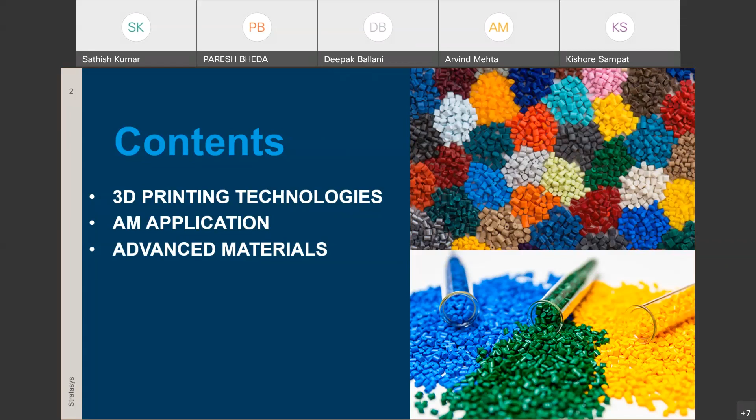Good afternoon, everyone. I'm Sathish, and I'm going to talk about how, especially in the way innovation is happening using 3D printing technology, we can drive more focus towards the manufacturing sector. Today I will talk about what 3D printing technologies exist, and there are many, as we can see, a lot of 3D printing technologies available. I will go in depth into what each technology helps with, and on the application side, how people can take it forward from each application, and what developments are happening overall in the 3D printing industry, especially advanced materials, and how people are now using those advanced materials in developing their processes and technologies.

So what is 3D printing or additive manufacturing actually? It is a process of joining materials in order to make an object. This definition was given by ASTM, the American Society for Testing and Materials, and they also recognized this as one of the manufacturing processes. That is why 3D printing turns into additive manufacturing.

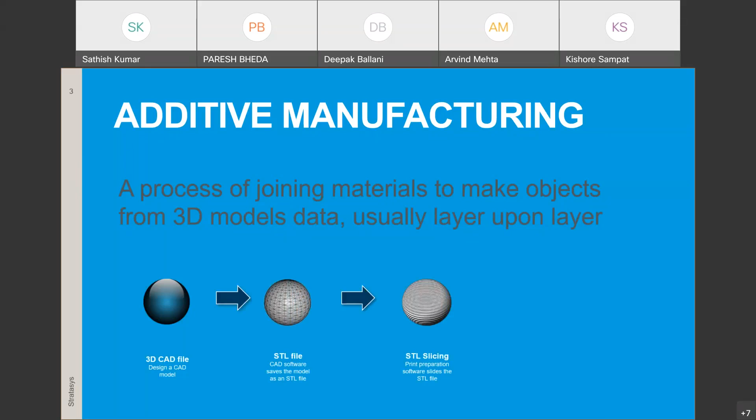For any 3D printing process, first and foremost we need some kind of CAD model, either from CAD software or through scanned data. This data generally goes in the form of STL, standard tessellation language, made into a mesh file. This data is given to a software that does slicing—similar to how a CNC machine makes a G-code, 3D printing software makes STL slicing, which slices the model layer by layer. This process is then fed into a machine where it actually prints layer by layer.

That is how the entire 3D printing object is created using this additive manufacturing process. Now, why do people want to go for this kind of 3D printer? Most of them will focus on these 4Cs.

The first C is compression of time. Right now in day-to-day manufacturing, time plays a very major role, and everybody wants to be agile and make their product innovation faster. That is why 3D printing really helps them cut off their time. If we compare with most traditional processes, you can squeeze the time close to 60%.

The next important activity is creativity. Sometimes there is complexity involved in product design that people want in manufacturing. Here we can overcome all levels of complexity and do creative innovation in printing, because 3D printing doesn't rely on traditional manufacturing processes. As it works layer by layer, the complexity comes for free.

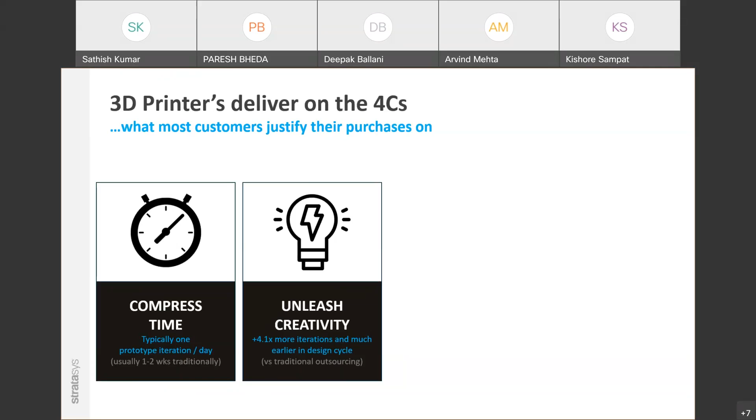The next very important C is cost, because cost plays a major role in any manufacturing process. Especially when you determine how the product or tooling is going to work for your requirement, everybody wants time consumption and cost benefit requirements. That is why 3D printers help in getting the end product requirement at a very early stage with almost 50 to 60% cost saving.

And foremost important, right now people are protecting their IP, intellectual property, so confidentiality. Any design, whether in mold design or thermoforming or many other processes, involves process innovation. If you take it from product design, it's a design; if you take it from manufacturing, it's how we design our gating. Everywhere that process innovation needs to be protected - that is the reason companies want to develop everything in-house.

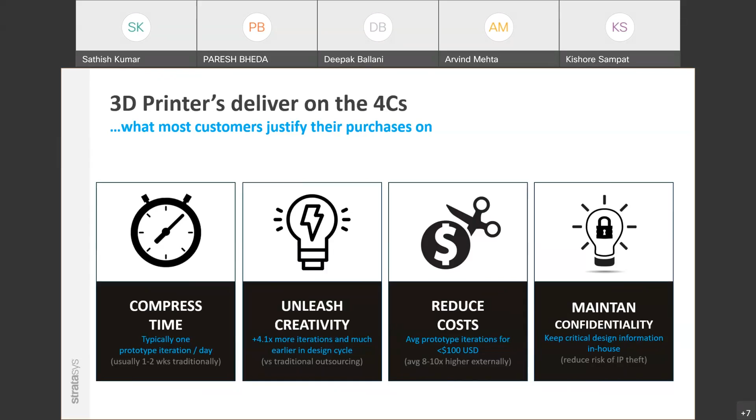So these 4Cs are what actually help 3D printing meet most product requirements. Now, what are these industries actually using this AM?

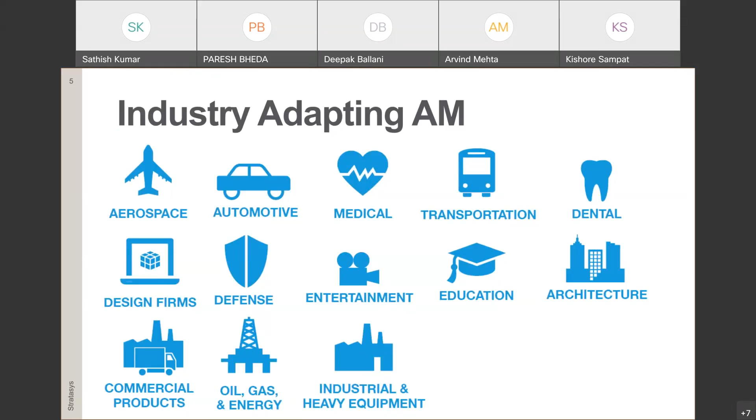AM means additive manufacturing. What are the industries? We can start from every industry - aerospace, automotive, medical, transportation, even oil, gas, energy, heavy industries. Everywhere right now they are using 3D printing. The main reason is because it is flexible for their process requirements, and it helps them across their entire product life cycle.

People start from initial design and want to move from design to engineering. They want to fine tune from engineering, work out on manufacturing aids, tooling, jigs, fixtures. Then they want to go for some alpha production and beta production, some very low volume production. Across the entire product life cycle, this 3D printing is helping.

We also have many different technologies to help in each of these processes. For focusing on the design segment, there are technologies called jetting and SLA - these are terms used by ASTM. If I mention extrusion technology, these come under extrusion technology. We have each of these processes defined by ASTM.

These two things come under it - jetting means PolyJet technology, FDM means fused deposition modeling technology. Now, if you want an extremely high level of quantity and you want to focus on mechanical requirements, we have a technology called powder bed fusion.

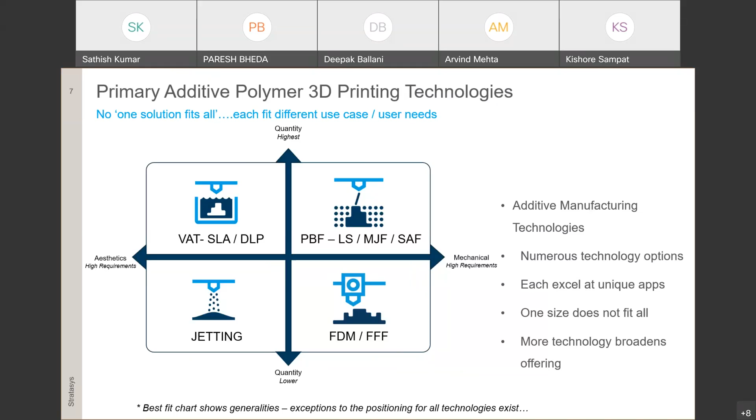The first technology is called FDM technology, which means fused deposition modeling. This technology was invented 30 years ago by a gentleman called Scott Crump, the founder of Stratasys, who invented this FDM technology.

This technology works similar to how people coming from an injection mold background would know, using thermoplastic material. Here, instead of pellets like in injection molding, this thermoplastic material is in the form of wire.

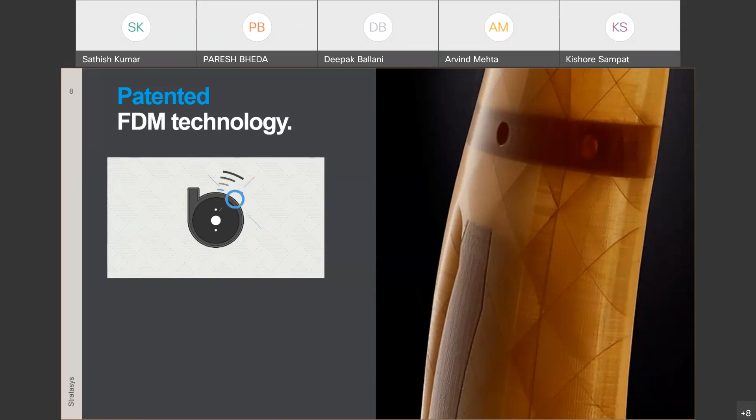As you can see from the animation, this wire is taken to a heater unit, which melts the plastic filament and extrudes it onto the tray to build the pattern layer by layer, from the top and bottom up. That's how we get the entire object made.

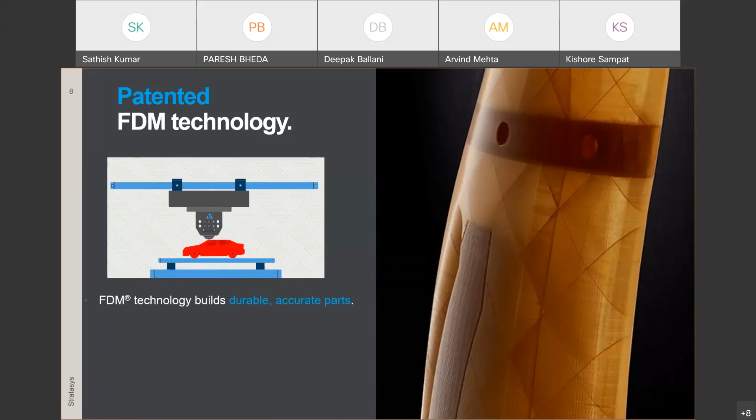This technology makes the most accurate and extremely durable parts. That's why this FDM technology is preferred by most people for prototyping, tooling, and also for end-use applications.

When I say end application, there are people from aerospace and medical industries who want to use certified grade materials and FST requirement materials. FST means flame, smoke, and toxic resistance - these are classified and certified materials for very specific purposes.

We can customize all these things based on the full range of material product portfolio, from standard materials to high performance materials.

What are those materials? Generic plastics from the ABS family or ASA family come under standard plastics. Going to the next level, engineering requirements include nylon, polycarbonate, and polycarbonate-based ABS material - this comes under engineering plastics.

Going to high performance materials, polyetherimide and polyether ketone, where people want to work in areas requiring high chemical resistance and superior mechanical properties.

Now take a material called Nylon 12CF - CF means carbon fiber. In this material, along with nylon, carbon particles are added - 35% carbon particles. This gives excellent properties, especially wear resistance and stiffness.

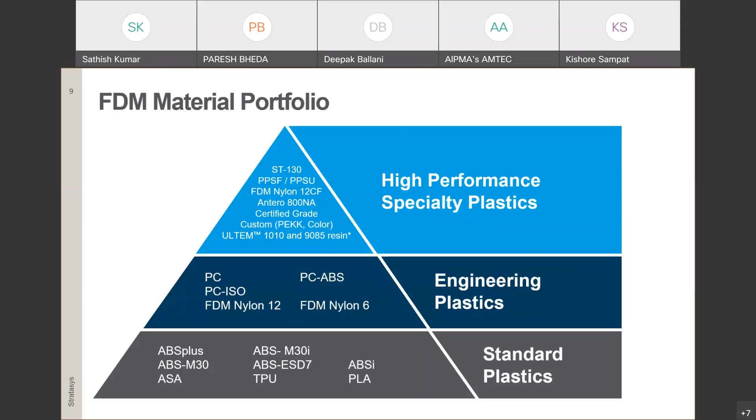For generic requirements, where there's so much material it can cause confusion about what to use, here's easy categorization: most fit-form-function applications and limited automotive testing parts can use standard and engineering materials like nylon and ABS.

Wherever you want excellent strength, a superior material that withstands high temperatures close to 220 degrees Celsius, food grade material, biocompatible specific material, ESD electrostatic dissipative material, or specific applications for space - in this area you can focus on high performance materials, simplifying the process.

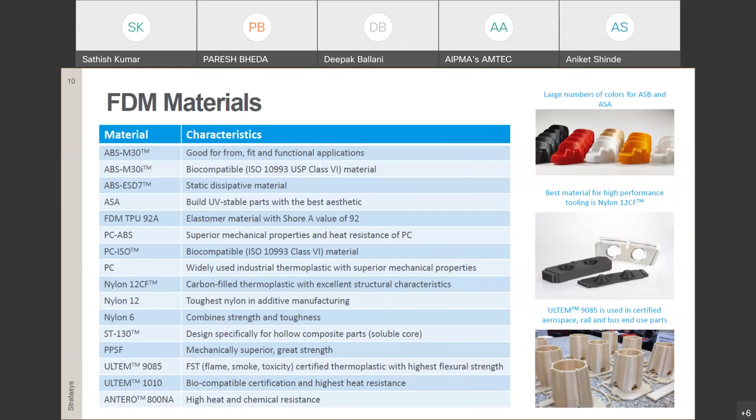What kind of parts can I use from this technology? You can make parts from smaller sizes to bigger parts, as big as a car bumper or even a truck bumper. You can make these because these machines are built for all durable applications.

You can use it not only for prototypes, but also for end applications. A quick summary: FDM is easy to use with all thermoplastic materials.

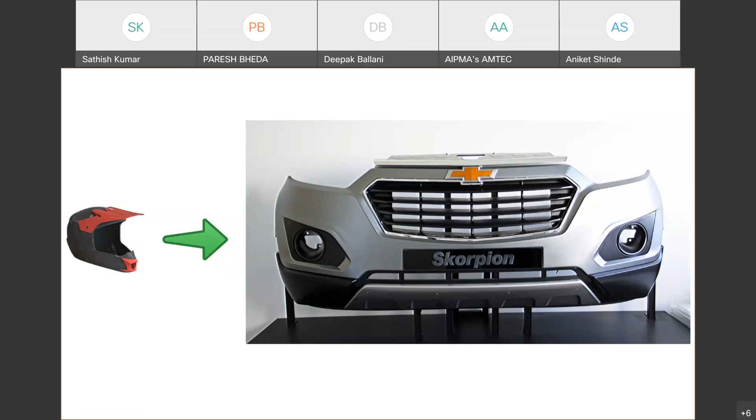You can use it from standard engineering and high performance. You can use it from prototype to tooling application. When I'm saying tooling, specifically you can use it on metal forming. You can also use it for fit form function. You can also take these for composite layup tooling, and end products, some of those things directly; you can use it for aerospace, every requirement. You can use this technology.

The next technology I'm going to talk about is called PolyJet technology. As per ASTM, this comes under jetting. Previously, FDM comes under extrusion technology. This comes under jetting technology. This technology, I would say, is a very powerful 3D printing technology. The most recent, it creates very beautiful, smooth and accurate parts.

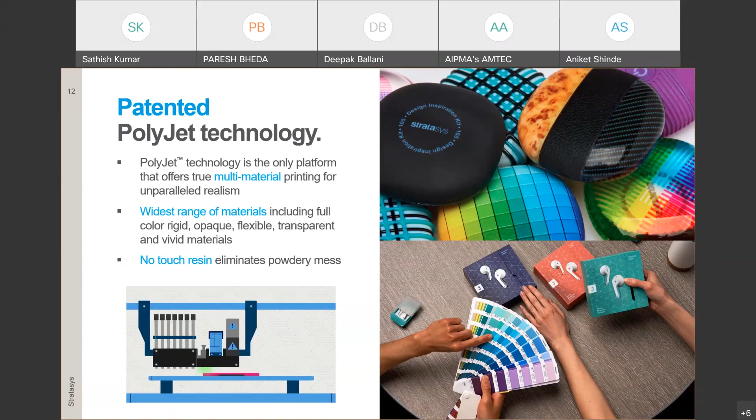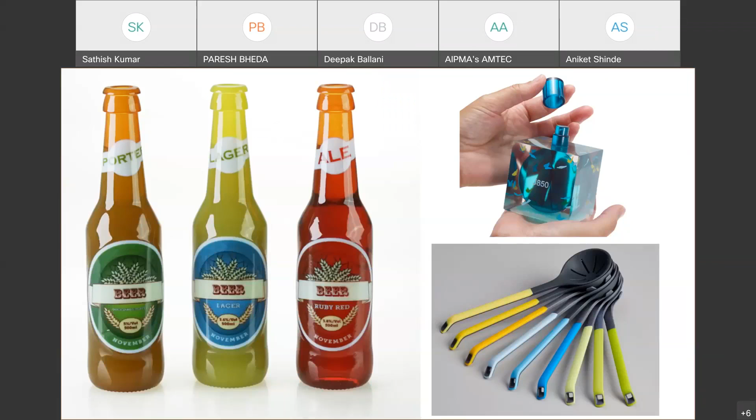Just to give some other examples of how this works, whatever parts you are seeing are 3D printed parts that came out of this technology. You can see the shape of the bottle; you can make a fit form, and also you can evaluate the colors. This technology will help you even take some of the Pantone color shades, because right now everybody is moving towards product innovation. You can also take those colors as part of your product design, get a very early stage of prototyping and evaluate it.

Is it only limited to that? No, you can work with something similar to a leather kind of material. It is not actual leather, but it mimics a leather-like texture. It mimics a wood-like texture, gives everything. And these are completely plastic. These are purely polymer, but it mimics a wood kind of appearance, so that you will get a fantastic CMF, what many industrial design people call color, material and finish. You will get this at the very early stage from this technology.

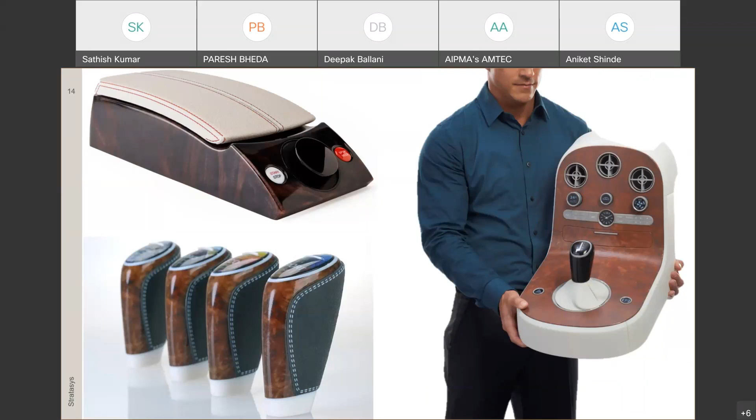Okay, what about this technology for manufacturing people? You can also make a mold out of it. With this technology, there are some engineering materials you can also use for molding. People can use these molds for applications like injection and also blow molding, which I will cover in more detail in my application slide.

The next technology I'm going to talk about is called stereolithography. Stereolithography is a very, very well-known technology available in the market. So how does this technology work? This technology uses a vat of liquid UV curable material, and this is also a photopolymer material. Here the UV or laser light passes over each layer and cures it at a time. That is the reason you can create very beautifully shaped parts from the machine.

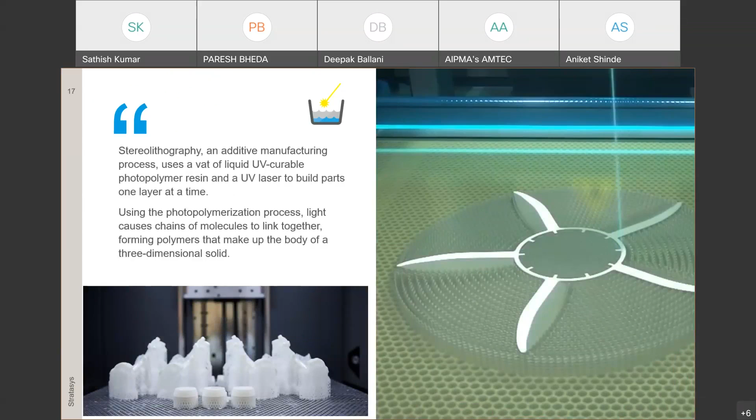And here you can get as much detail as possible from this technology. It's very good for making bigger, large-size prototypes. For manufacturing people, you can create a pattern out of it. Using this pattern, people can make silicone molding. You will get a very clean shape out of it. And there are a lot of applications.

You can also do some injection molding. You can also make some jigs and fixtures out of it. And there are also parts you can make for some end products. But primarily people use this technology mostly for pattern making and also wherever people want a very clean surface.

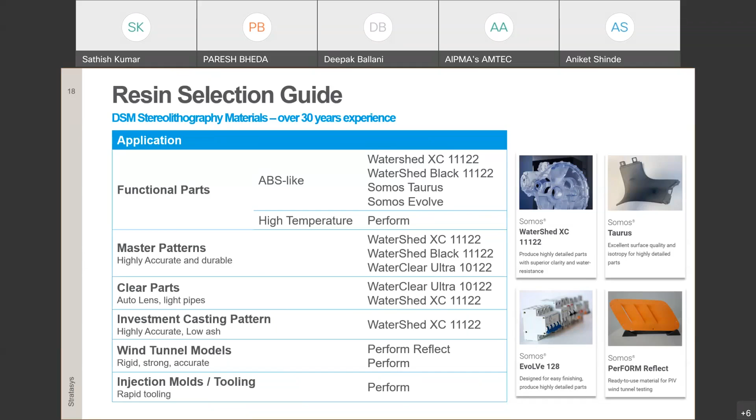And this technology primarily helps them with that. Now I've shown you FDM technology, PolyJet technology and stereolithography technology. The next two technologies I'm going to talk about are geared towards the production side. The technology name is SAF. SAF means Selective Absorption Fusion.

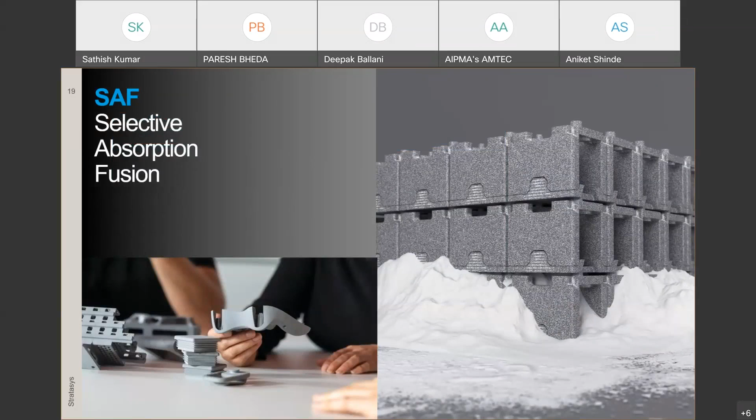So with this technology, you can see from the image, it uses a powder material. These powders are polyamide, and polyamide is nothing but nylon. So it uses a nylon powder for most of these applications. So how does this technology work? It's a print head based powder bed fusion.

So here, if you look into this one, the powders will generally be deposited throughout the inside area, and there will be a binding mechanism. This will be deposited layer by layer, and there will be a fusion agent which passes immediately when that is happening.

So what advantage do people get working with this SAF technology? You will get engineering material like nylon parts, and you can also make it for your extremely high volume production parts. You can take it for all mechanical strength applications. This technology really works very well for them.

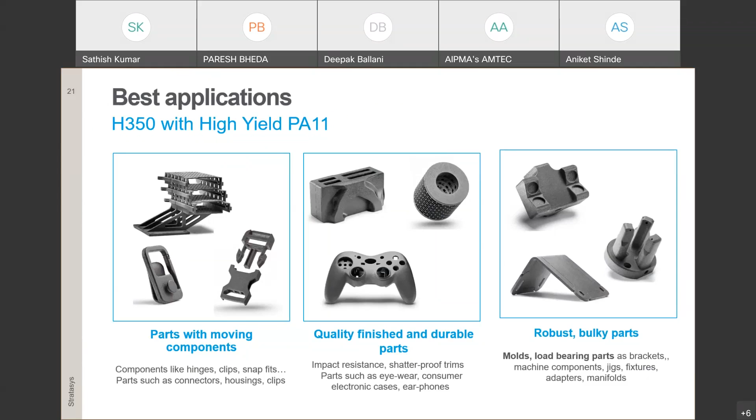Okay, is it limited only to small parts? No, you can also take some of the parts for snap fit applications, and you can also take it for mass customization requirements, because this is becoming more famous in that way. People are starting to make parts with it. This fits most of the applications people want to do.

The fifth technology I'm going to talk about is called P3 technology. P3 means programmable photopolymerization. This is an advanced version of DLP, digital light processing. It's a similar mechanism to how stereolithography works, but instead of the laser light, the entire light will make that area totally curable.

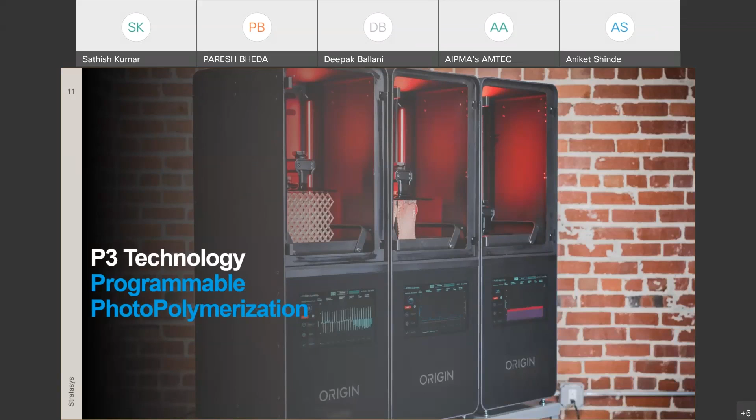So what is the advantage for people working on the DLP process? DLP is a very, very high throughput process. Here people can get extremely fine detail in parts taken out of a DLP machine. And compared to the limitations of stereolithography, you can go for an extreme range of high performance materials. They can customize their material in such a way that it works at extremely high temperatures and is also suitable for high impact load material properties.

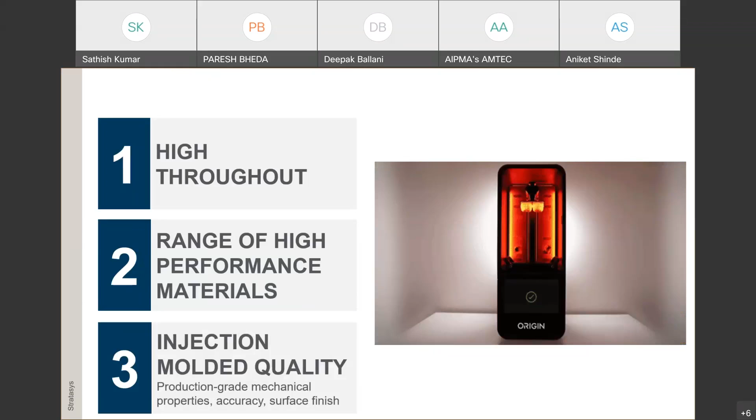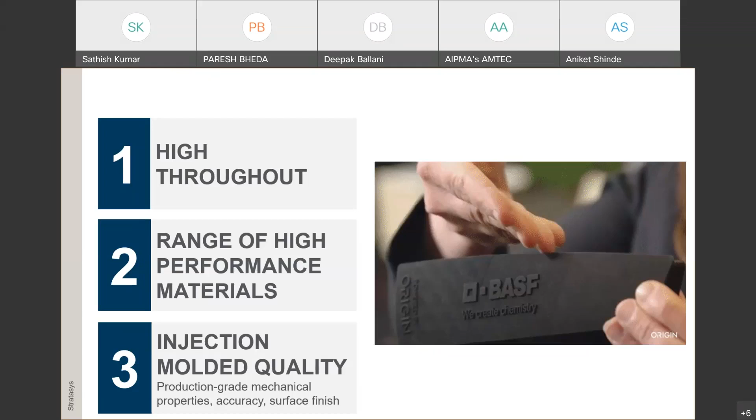And very importantly, right now it is extremely challenging to get the best injection mold quality in any 3D printing process. This P3 technology is designed in such a way that you can get details close to 50 microns. That means you get the best injection mold surface finish directly from it.

And as mentioned regarding high performance materials, you can also do material customization with this technology for very extreme high temperatures, where people specifically want to use it for FST, which I mentioned at the start of the slides: flame, smoke, and toxicity resistance, and also for high temperatures. These are specific requirements for most aerospace and defense applications. So here you can open up these applications with this technology.

And you can also use it for many mountings, connectors, brackets, all detailed parts. Whenever you want an immediate prototype with injection mold quality for very minimal parts, this technology really helps.

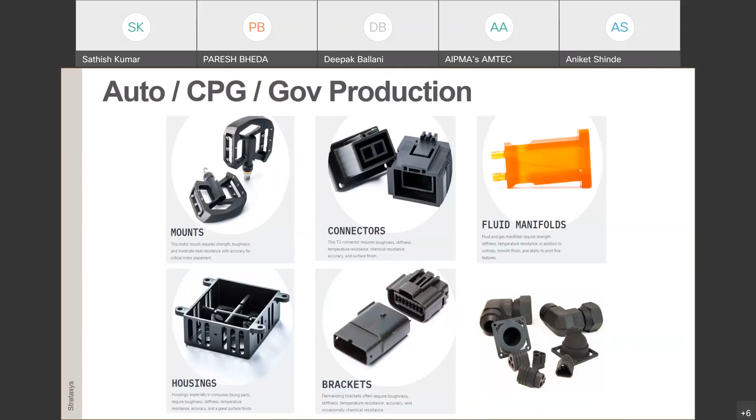Okay. I've now talked about all the technologies: FDM, PolyJet, stereolithography, SAF, and P3 technology. Now, how do people use these technologies in applications? Like I mentioned, people started using them for prototyping, and now people want to move to the next stage: tooling and end use parts. Tooling is for people in manufacturing, because this is mainly for the manufacturing floor.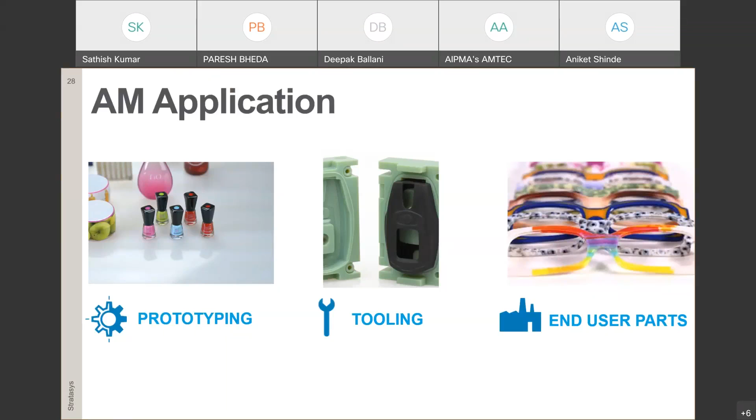So what is useful for you in manufacturing? People can use it for fixtures, for molds, for silicone molding, injection molding, even blow molding. A lot of things you can use it for.

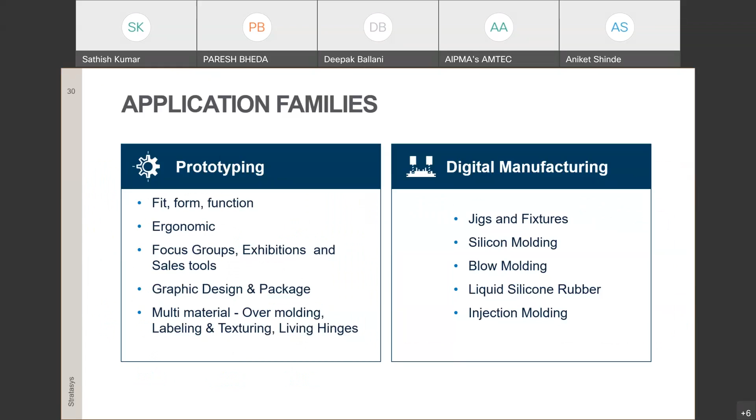How? Right now, in a lot of 3D printing applications, people primarily use it only for prototyping. Still, the blue ocean is what we call digital manufacturing. Silicone molding, blow molding, injection molding, most of them are still not really exploring those capabilities. So I will talk about a few of them in my next slide.

I'll also talk about one more part, called carbon fiber. People really want to make a lot of cost-reduction parts, converting from metal applications to lightweight applications. So carbon fiber is the best fit for people who want to make such parts in a customized way. Here you get the best of the part in strength, and you also get lightweighting.

Taking an example, many of them are asking about this right now. Looking at India as manufacturing, EV and drones are growing a lot. Lightweighting plays a very important role in increasing their payload capacity and also the battery performance. So you can consider adopting carbon fiber in that way.

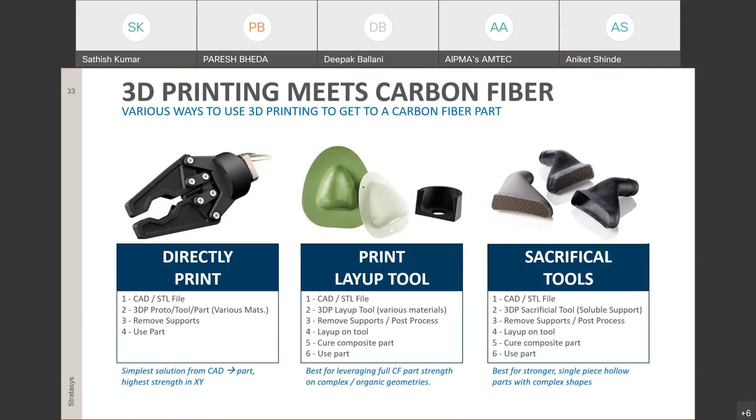Now there are many ways, instead of going for the traditional process, 3D printing helps simplify carbon fiber. You can work on the layup tool, sacrificial tool. So you don't need to spend a lot of money making a mold. Simplified 3D printing will help you develop such lightweight parts.

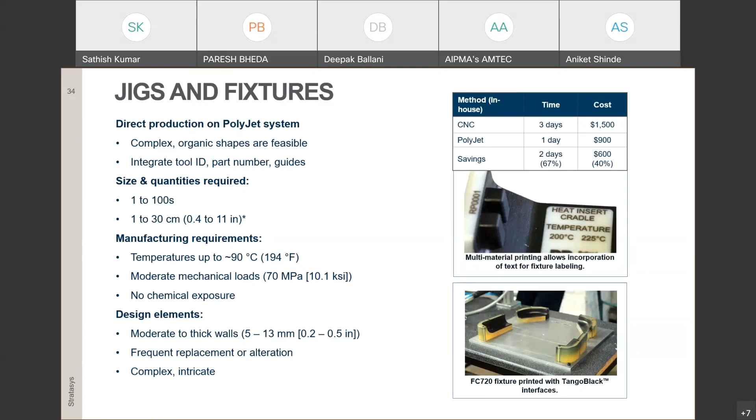Going into jig and fixture applications, you can see how this helps. People can work out a lot of such jigs and fixtures in manufacturing. In manufacturing, people even consider scratch areas with a multi-material process. You can use these different 3D printing technologies. You can also insert your part wherever you have a scratch-resistance area. This rubber material will help you prevent those scratches directly.

Talking specifically about silicone molding, stereolithography or PolyJet technology helps you create very beautiful parts. You can use those parts as a master, and using silicone as a mold, you can develop a limited number of parts, less than 100, less than 500, based on complexity, so you can reuse your silicone mold for that many parts. And if you want, you can work again with the same pattern. This is the very easiest way to create proto parts.

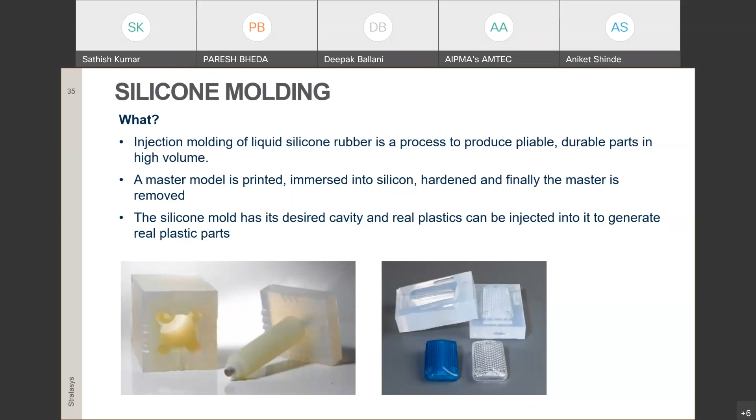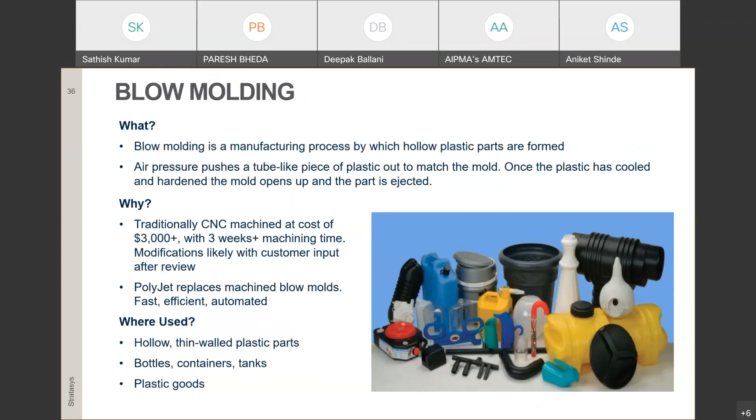And blow molding. Especially for hollow shapes, people want to work in a customized way. For low-volume parts, instead of CNC, you can try this PolyJet molding. So I will play a video in which you can see two processes: one is extrusion blow molding, and also injection molding.

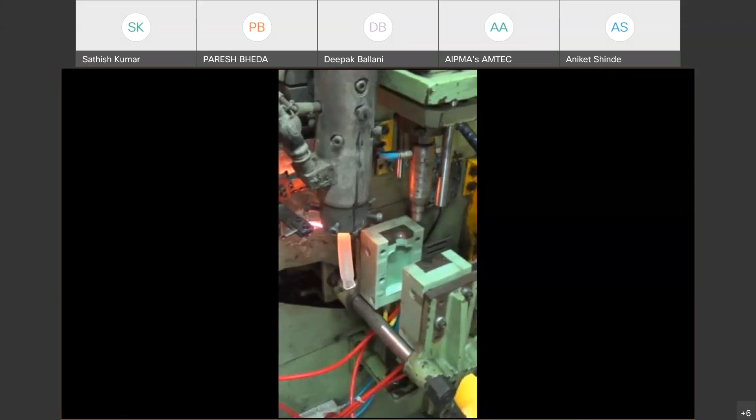In this video, whatever you see in green color, these green parts are made as a 3D printed mold. This is to make a bottle part. Now there is extrusion happening on that material. Now there is blowing happening. You can see the parts easily came out.

Sometimes there are a lot of things people want to try out in prototyping. Here 3D printing really helps them make these low-volume parts, and these parts are not made as a replacement for your steel molds. Sometimes you want to make very low-volume parts, or you want to do product iterations. This technology will help you squeeze your time by almost 60%.

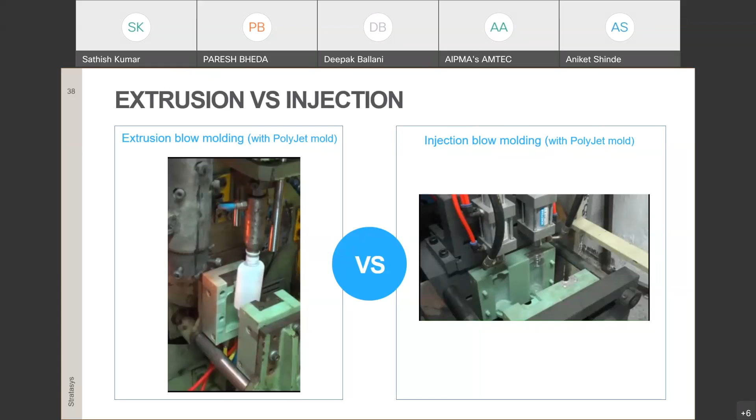It will help you squeeze the time. So it's a very major benefit for most of them, because when you want to bring your product to market, it really helps a lot. And similarly, in another one, you can see a blow molding application.

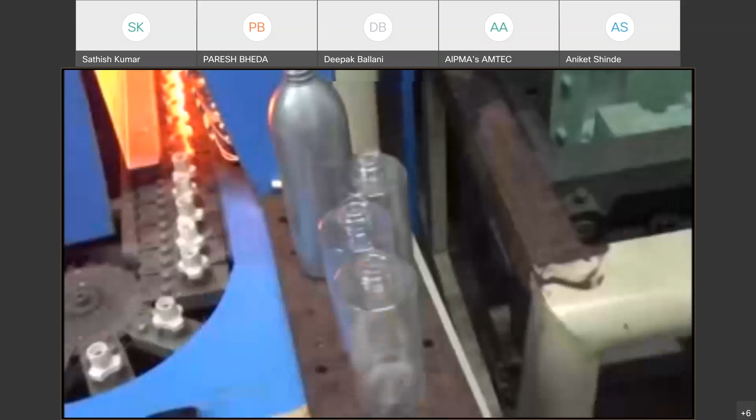And similarly, you can use it for kind of an injection molding process also. So this is one of the recent things actually; a lot of people are trying it for footwear molds, because especially in footwear molds, the designs come with a lot of complexity. So when you work on your CNC design, sometimes it will really take a lot of time developing the shapes exactly as you need them.

And when you work on a redesign, these 3D printed shoe molds really help you make these custom shapes and make it a much easier time for you. And here, these materials can also withstand temperature for high-heat applications. That is what these advanced materials do, not only just prototyping. Now you can try them for all your manufacturing applications and also get parts as good as you get from your traditional parts.

So I've talked about prototyping, and I've talked about tooling. So what is happening in end products? Using technology like what I was talking about, like P3 technology, some of your low volume parts you can directly start using for end applications, like housings, enclosures, and some of the mold inserts you can also work on.

And there are some specific biocompatible materials. Even right now, when people are working on ventilators and on custom shapes, there are already certified materials available for these kinds of medical components. So I can give you an overview right now.

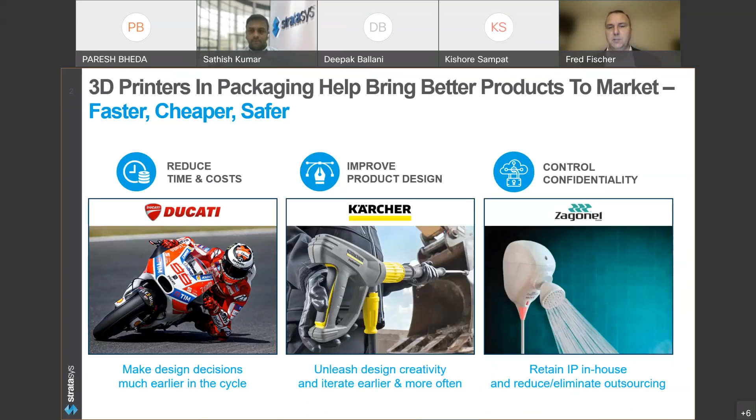So now I wanted to pull a few data points out, and this is a success story that we'll show in just a moment. This is a guy named Matt Lavin from a company called Togus in the US, a very classic plastics processing company, but the benefits and where he applied 3D printing and why he applied 3D printing in his business is, I think, really relevant to this particular audience.

So again, classic guy doing blow molding, injection molding, thermoforming, basic classic plastic processing. So where does 3D printing fit for a classic plastics processor? It's a few different things to keep in mind. Now, first and foremost,

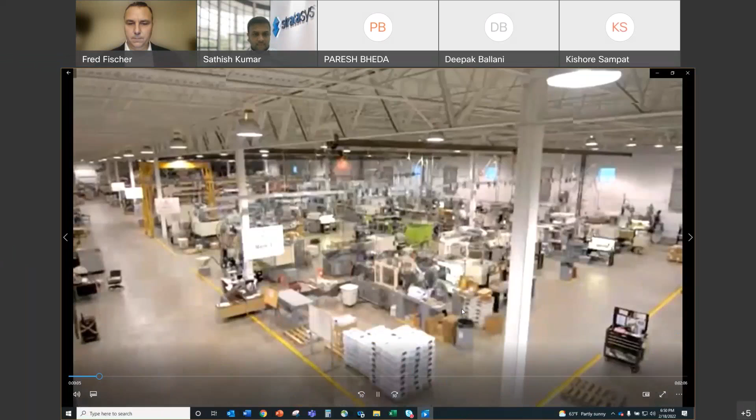Fred, please go on screen sharing mode. Yeah, no, I need to pull the video up. I'm just digging for the video right now, so no problem. All right. There we go. Okay. All right, it's coming. 1 second. I will share the screen. Okay, bear with me. Okay, we'll try this, and just interrupt me right away if it doesn't work. No audio. Oh, you can walk through it. Okay, all right. Well, I'll fast forward then to the information that you're looking for.

All right. So anyways, Togus, why did they invest? Again, it's helped them differentiate themselves amongst their peers and to offer a broader solution to their customers. It helped them diversify their revenue stream. So if you listen to him, he'll say that it seems like when prototyping is up, manufacturing is down, and when manufacturing is up, prototyping is down. So it levels out the revenue stream. And he's also a really big adopter for putting additive out on the manufacturing floor.

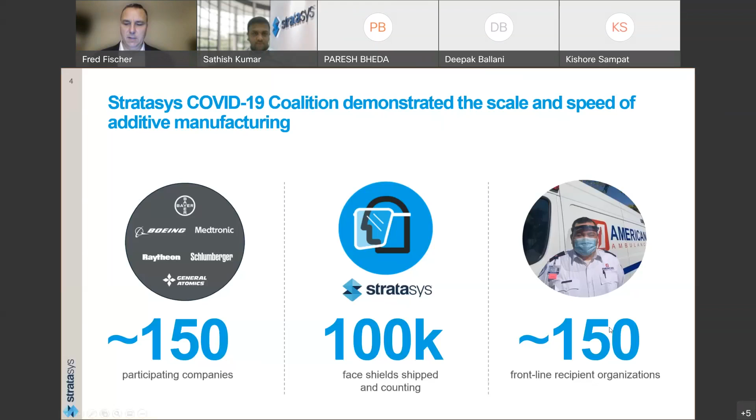I may just go back, even though you can't hear the video, I'll just show the video. He puts it on his manufacturing floor, right? So again, this is a prototyping center. And what he does is he also deploys out on his manufacturing floor for 5S, jigs and fixtures, for tools to help his manufacturing. So here's a 3D printed end of arm tool. There's some 5S organizers for punches for CNC equipment. You see the 5S organizers in his drawers inside of the cabinet as well, right?

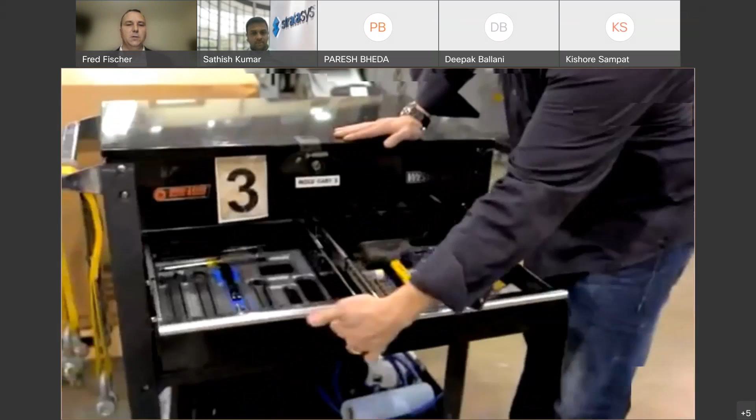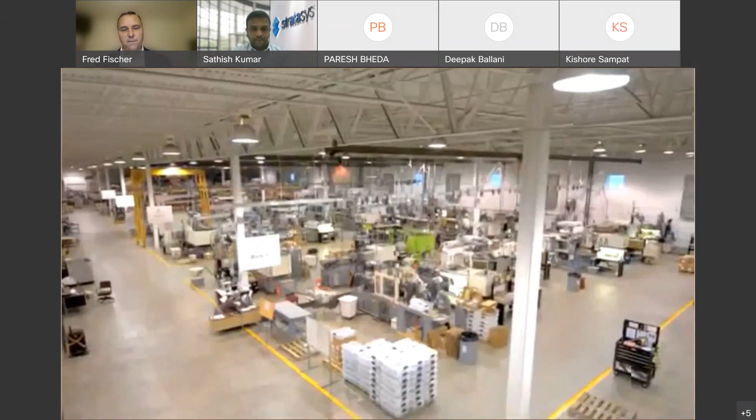So not just printing parts to deliver to his customers, both as prototypes and as production parts, but also as a mechanism to make his manufacturing organization run more smoothly. He's really on the edge of 5S, Six Sigma, innovation, etc. So a bit about why they adopted.

So the design of the packaging is critically important. So packaging has historically been one of the largest industries for prototyping, but you'll also see it for some of the plastics processing applications as well, right?

So it fits really across the entire spectrum, from prototyping to low volume manufacturing for plastics processing. I'll start with tooling, because it's probably what more of you are interested in understanding, and you'll see some of the same things, not accidentally, but very intentionally, as to what Satish referenced earlier.

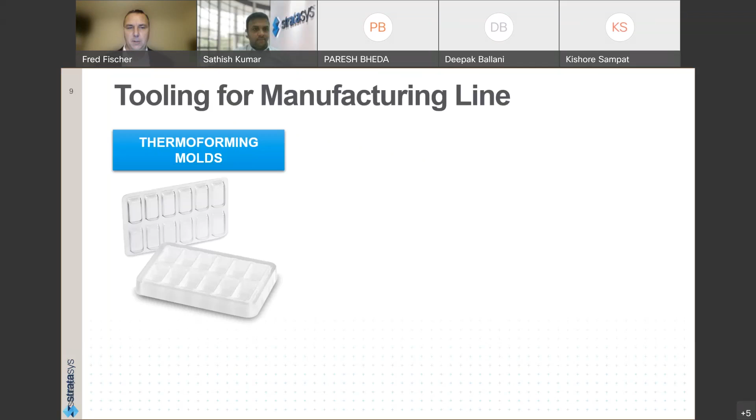So thermoforming molds are one of those applications, actually incidentally a design I made some time ago, as a little small prototype of a gum package, or a pill package. Injection molding too - generally speaking, for both thermoforming and especially injection molding, it's where the volumes are relatively low and the materials are in the engineering to standard range, and also blow molding, similar to the video that Satish referenced earlier.

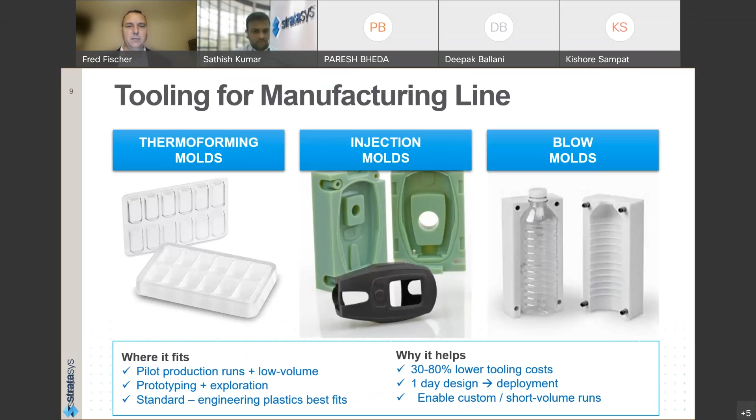So again, where it fits - it's not a replacement for your long-term, high-quality conventional tooling across any of these, or for that matter, almost all the other application spectrums. It's a great fit when the requirements are low to moderate from a volume of parts standpoint, and there's really pressure to get something to the end customer. That's true across all of these. So this is a key place.

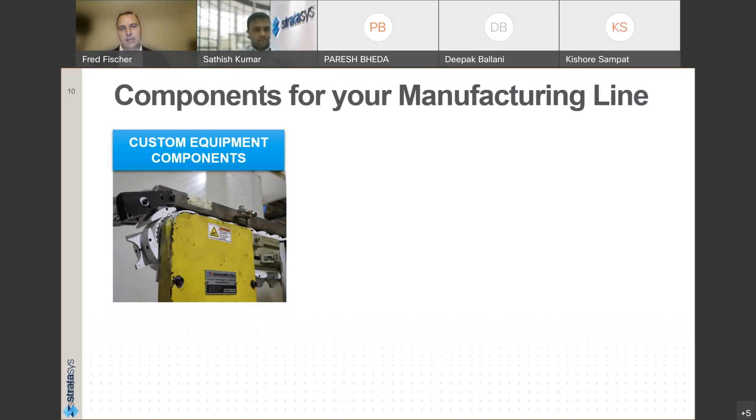Now, as I referenced before, the packaging manufacturers - the people making the packaging items - are also common adopters on their manufacturing floor for many of the same things Satish referenced before. So custom components for the manufacturing equipment, whether it's adapting the equipment for the size bottle or package being filled or moved through the organization - 3D printing is a great fit in many instances because there's no real major aesthetic requirements. You just need to make a tool or component for the manufacturing equipment that you can deploy on the floor very quickly.

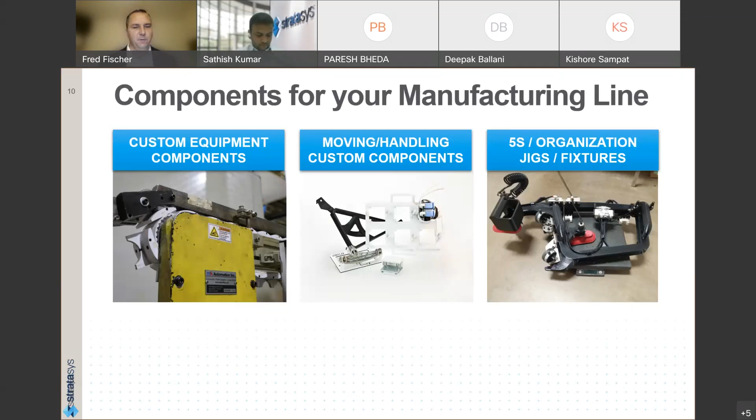Also around moving and handling custom components - jigs and fixtures, inspection fixtures, general movement pallets, dunnage trays, either directly or indirectly produced - are really common places where 3D printing is used for the packaging industry. And as you heard in the Togus video around 5S organization, jigs, fixtures, and general tools on the manufacturing floor make it run better. Generally speaking, it enables manufacturers to put more tools, more components, more specialty products, more jigs, more fixtures on the floor to make the operation run smoothly.

Where 3D printing fits in comparison to making those components conventionally is where the complexity of the design or part may need to be, or can help the function if it's more complex in shape. Simple blocky shapes, like a block with a couple holes in it - 3D printing is probably not your solution. But if you have a really organic shaped product, like the window alignment fixture you see here, that's where 3D printing can really come into play, or where lightweighting is helpful, or where it's a replacement for aging equipment. Something breaks, it's a 50-year-old piece of equipment, you need to make it yourself - you don't ring up the manufacturer to get it anymore. And again, the same benefits apply here around time, cost, in-house production, and actually making a better tool or manufacturing component.

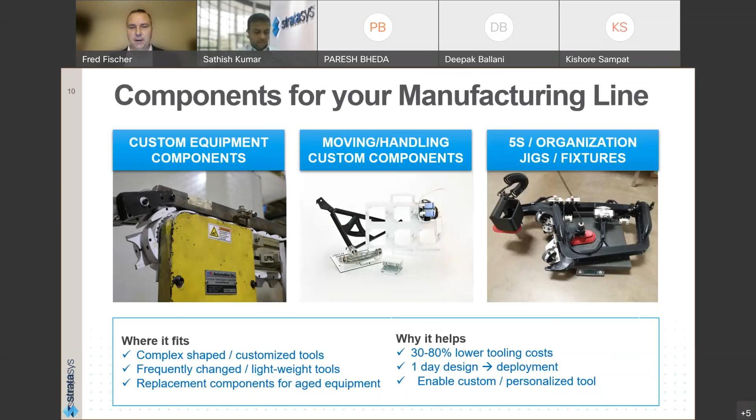So this is the production of the actual packaging equipment itself. Now, we also see many customers deploy it out on the floor to keep their equipment running well. In this instance, it's a CNC shop, but they put some inexpensive 3D printers in their shop to make components - components to hold the product as it gets machined in their inspection area, etc.

This is some of the inspection equipment that they do - the end of arm tools to move parts in and out of the CNC equipment. And again, we see the same thing happen in injection molding, blow molding, etc. - something that goes in, grabs the product, and pulls it out of the equipment.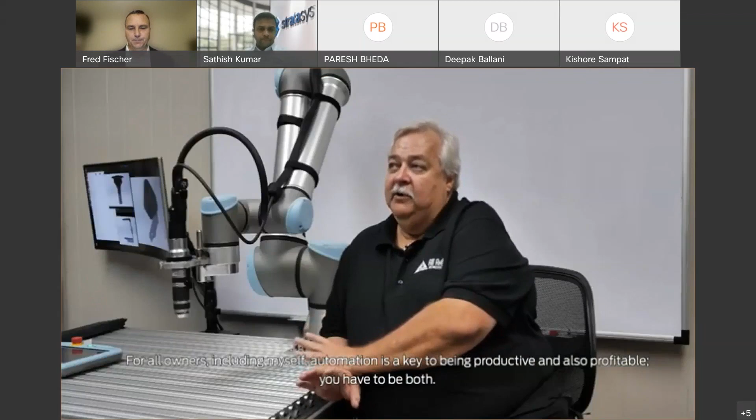So now more to the visually appealing place where 3D printing is used in packaging. This is really around starting to use 3D printing to explore more designs and bring a better product to market.

As we mentioned before, there's an increasing focus on the customer experience that starts with the unboxing experience. This is a classic example of an electronics manufacturer that was really looking to do that. How can they pack all of these things into the actual package itself, and how does the user feel as they open one design versus another, exploring color.

You can, of course, do this through a conventionally printed 3D part that's all monotone, a white part, and then someone paints the model afterward, still in use today, or wraps it with vinyl. What you see here are all examples that have been printed with full color 3D printers, so it can go from the digital design to what you see on the screen here directly from the 3D printer.

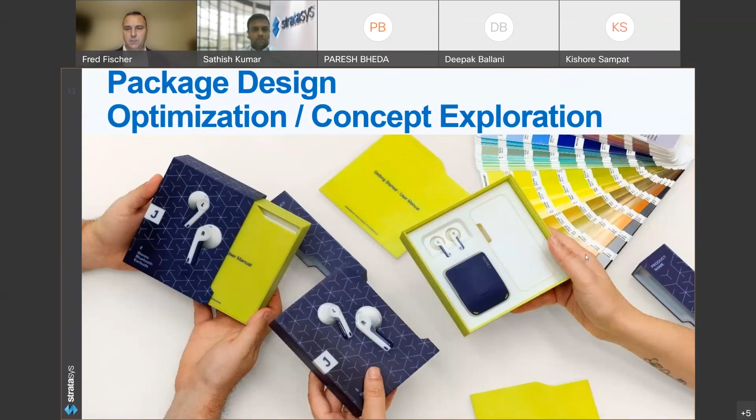That enables more iterations, more design exploration, and inevitably getting a better product to market faster.

Now that plays out in many different places. Looking at the aesthetics, the visual appeal of a product earlier in the design cycle, of course, helps. It helps everyone bring a better product to market. So marketing models are kind of a classic place.

In this instance, this was a marketing model that was produced just for the photographer to set everything right prior to the actual production packaging being available.

Quick prototyping of complex designs - again, color 3D printers are enabling that to happen much better than before - and really then to enable data-driven decisions. So having focus groups that look at 5, 10 different design iterations and getting the data back to see what was visually appealing, both aesthetically appealing, but also what felt right.

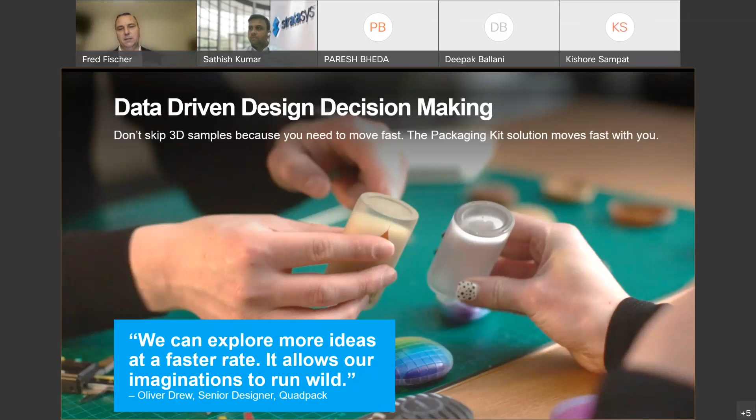So the sound that a product makes when you open a package up, the feel of the product in your hand - those are things that are very difficult to derive from looking at a bunch of flat 2D printed images on a wall, rather than physically putting that part in the hand, which has not only the feel and sound as something opens and closes, but of course also the aesthetics itself. So that's a key way that 3D printing is used in the packaging industry.

Just to give a comparison around time - we talked many times about how time is a big benefit. Here you can see the typical time that it takes.

Generally speaking, 3D printers will produce a part same day or next day. There is a correlation between the size of the part, the number of parts you're producing, and of course the technology that you choose, as Satish showed you. But generally speaking, 3D printers are not instantaneous. If you put a design in, you'll probably get it same or next day.

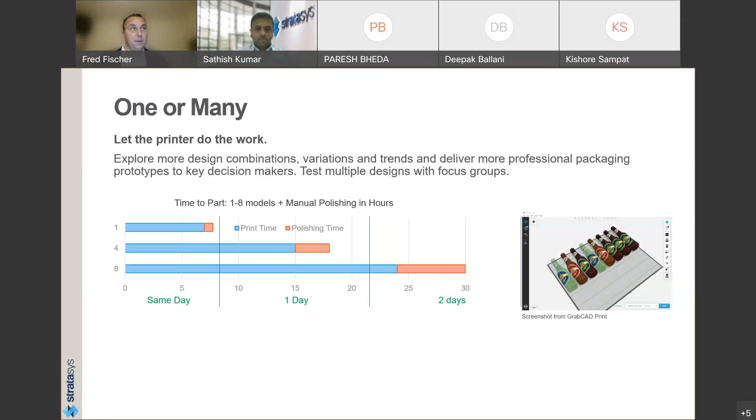This is an example of the beer bottles that you see on the screen here. Getting one, you get basically in the same business day, and as you pack many more in, you get those in a scaled fashion. There are economies of scale to pack many parts together.

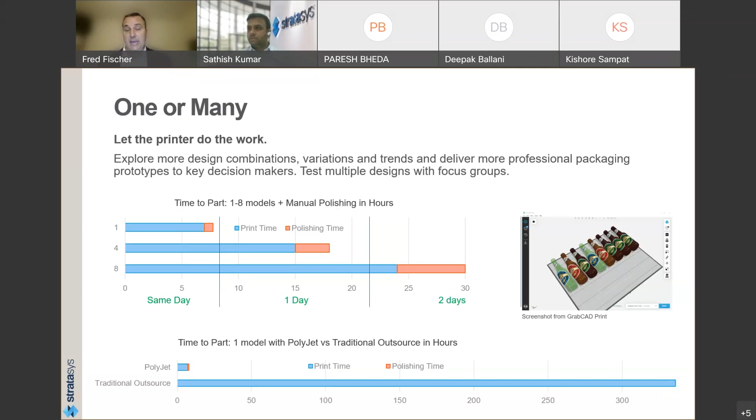Now, in comparison to conventional outsourcing, this happens to be drawn in hours. But nevertheless, the point is doing this 3D printing in-house directly, without having to polish or paint the models afterward, is a big time saver for many, many companies. And of course, that's a huge driver in the packaging industry - the appeal of the product itself.

I'll just show some video from a company called Quadpack, and talk through what's happening. Here they talk about how critically important product packaging design is, and how they conventionally would go through those design concepts and iterations with their customers by looking at a wall of concepts, two-dimensionally printed. They still do this, but now as the product matures and as they have clients, they start to do that in physical three-dimensional form as well.

Exploring various different shapes, different colors, opaque versus translucent materials directly from the 3D printer. There's an example of what conventionally they would get from 3D printing, a single white part that has the right shape and feel. But the image you see there is an example of a directly 3D printed part from a full color 3D printer. So for them, it really is critical.

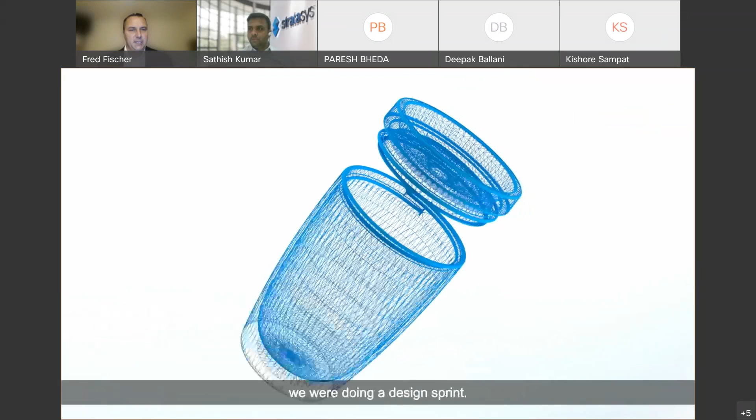There's a spot in the video where they open a lipstick case, and the case itself pops, you can actually hear the sound it makes. That was one of the key things they wanted to assess in the design, much like automotive companies obsess over the noise a door makes as you close it, or the sound a knob makes as you turn it, or the shifter. These are things that are really important to the customer experience, and 3D printing these days can enable that level of detailed assessment to happen.

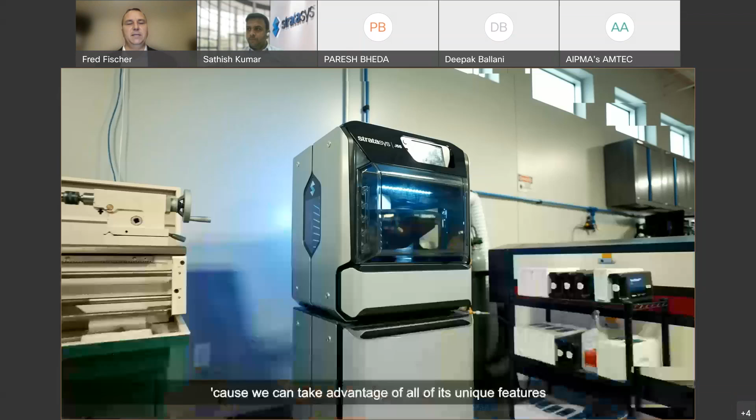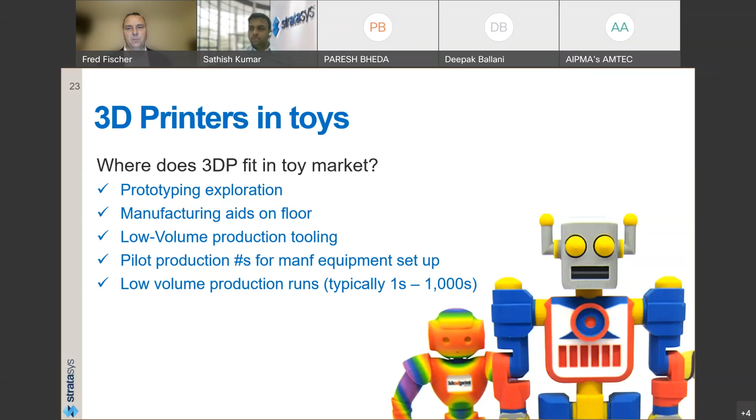Quickly transitioning then into how 3D printing is used in the toy market. Here, very much a similar place, where exploration of a lot of different ideas happens from a prototyping standpoint, but out on the manufacturing floor, you absolutely see examples of 3D printing in all the examples I just referenced earlier - jigs, fixtures, organization tools, just stuff to make the manufacturing process run more efficiently.

This is an example of a company based here in Hong Kong. They design and help create or execute production of toys for countless different manufacturers - Mattel, Hasbro, Fisher Price, among many. This Nico is the one they feature here, and I'll run the video and talk to it in the background around how they've used 3D printing.

For them, it's a really key tool for much of the same benefits or reasons in terms of engaging with their clients and customers. There's no better way to understand and feel how a toy will feel in the hands of a child, or how appealing it will look on the shelf, than three-dimensionally printing it, putting it in the hands of the child and doing focus groups, or looking at different designs including packaging with the product on the shelf to see what is appealing. So toys are certainly driven by many of the same attributes.

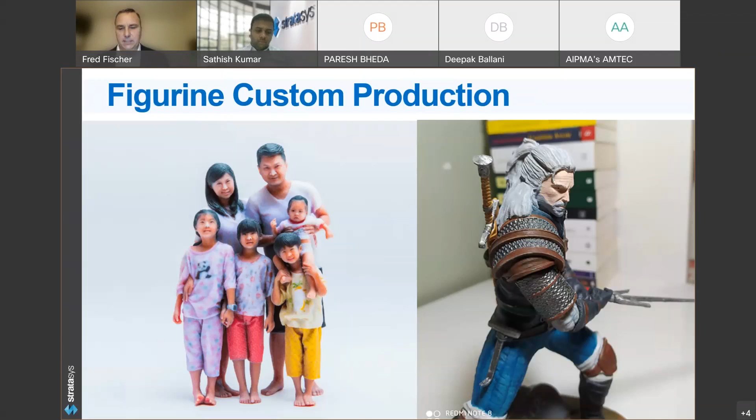There are other derivatives of toys, like figurines - Iron Man with someone's head on the model itself, or figurines produced for particular individuals. The gaming industry - the image on the far right is an example of someone's character from the gaming industry. This is really a big driver for 3D printing. The figurine industry is growing very, very quickly.

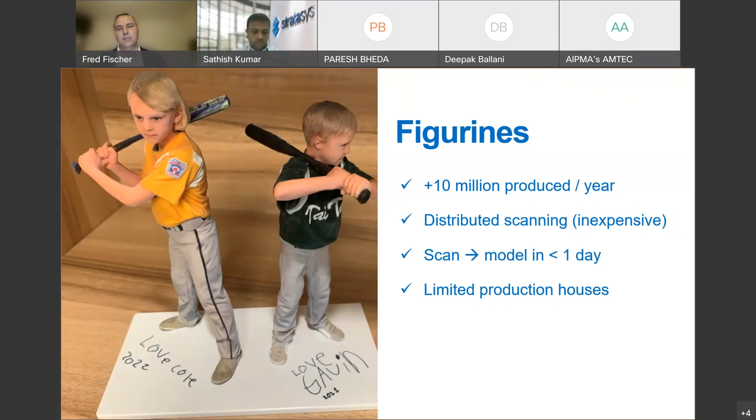In summary, where 3D printing is used in both packaging and the toy industry is again all the same applications. Prototyping is still the core reason most customers adopt 3D printing today, but you absolutely see examples of tooling on almost all toy and packaging OEMs' floors, and there are increasing uses for low volume or custom manufacturing as it goes.

Example: in packaging, L'Oreal as well as Maybelline are working to make, or are now producing, custom packages for their very high-end clients that are unique to them - not just the lipstick color, but the actual package itself customized to the person. So that's an example of where 3D printing is going. I'll pause there if there are questions, but that's a little deeper look at where 3D printing is used in both the packaging and toy industry.

No, can you guys hear me?